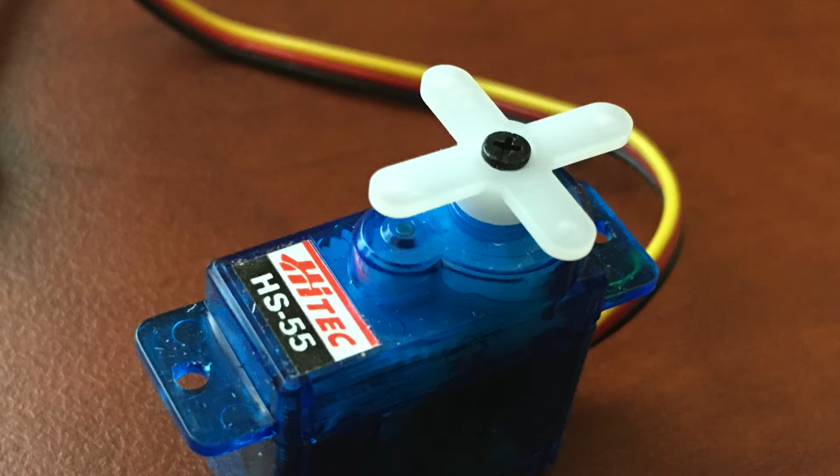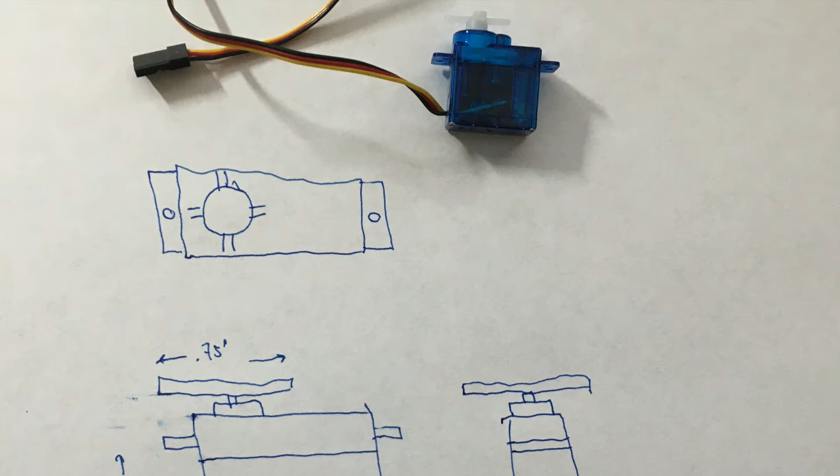In this second of two parts, we'll show how to draw the top and front view of an HS-55 servo in TurboCAD, going over some of the more common techniques.

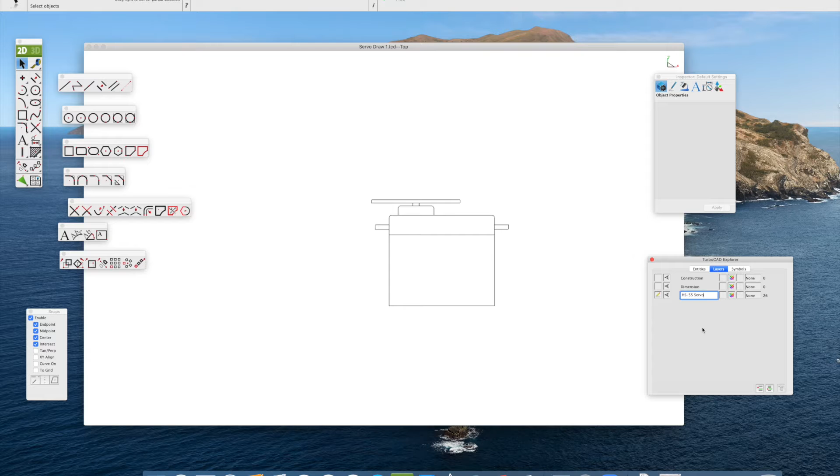Continuing from part one, this is the side view of the HS-55 servo. One thing I didn't do in the first part was name the layer. It's always a good idea to name whatever layers you're going to use. We're only using one layer in this example, but it's still good practice.

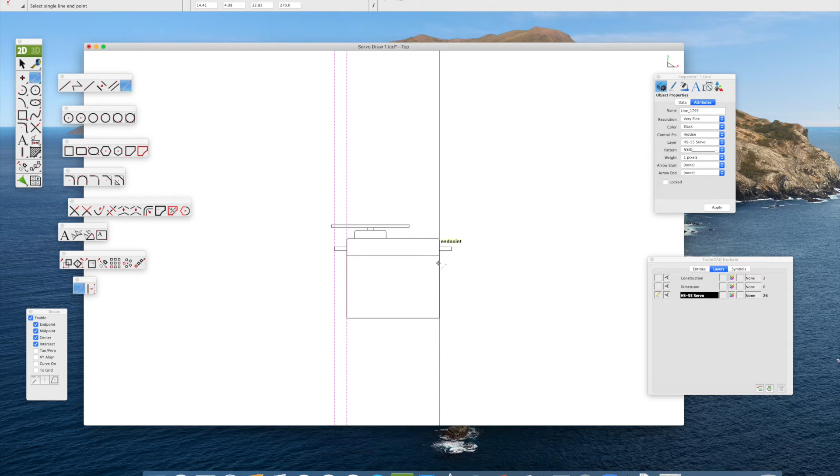Using the scroll wheel, we can enlarge or minimize the size of the servo. For the top view, we're going to put some construction lines using the snaps to the endpoints, which allow us to accurately copy the dimensions of the servo without having to remeasure the lines. You can put any number of construction lines on that you want. They can be deleted, and as you'll see in the video, they can also be used as cutting edges.

In this case, we're going to snap to the outer edge of the mounting arms for the servo. We'll use a parallel line tool and just drag it up, with the inspector bar at the top giving the correct distance for the width of the servo in the top view. Snapping to the endpoints, we can draw the other lines that describe the servo from the top view. Again, the construction lines are really handy because you can snap to the construction lines.

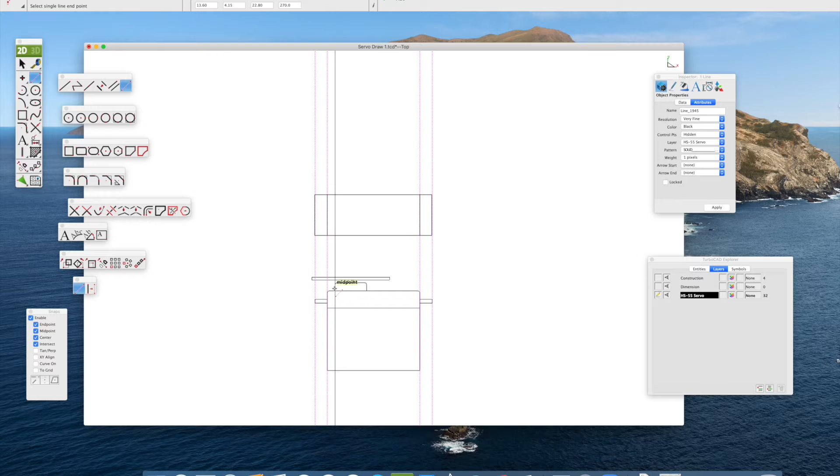Now we're going to add additional construction lines for the central gear housing to draw that circle using a two-point circle tool on the top view. Once the circle is drawn, we can go to the selector with the grabber and just place that circle in the middle of the top view.

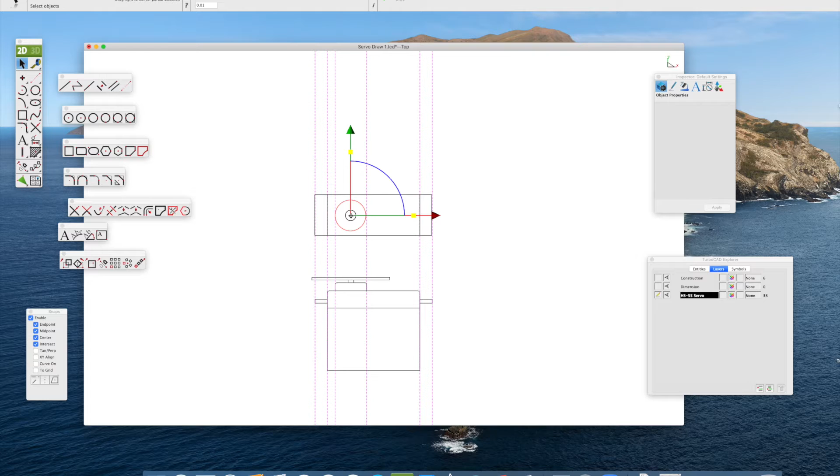Right-click to the construction lines, go to the bottom of that, and we can delete all the construction lines. Using the fillet tool, set a 0.02 radius. Again, you need a smaller radius because this is a pretty small servo, only about three-quarters of an inch long. And again, the fillets are just for appearance sake on the corners.

And it's always good to save your work in TurboCAD as you progress through the drawing.

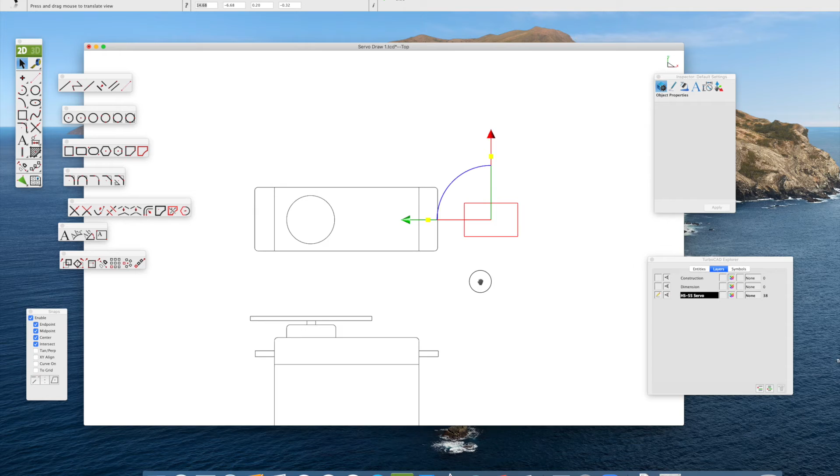Now we're going to add the HS-55 label to it. We're going to just draw a box, about the size needed for the HS-55 text. Using the rotate tool, we'll turn it close to 90 degrees in the inspector bar towards the top. We'll type in 90, hit enter, and that puts it precisely 90 degrees from where we had it before. Just move this off to the side.

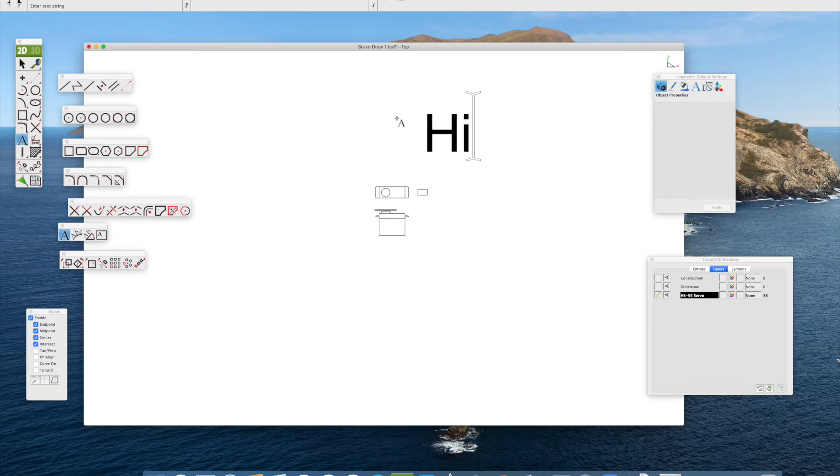Next we're going to select some text and add it to the inside of that box. Notice when we select the text, it's a rather large font size. We'll type in Hitec first. Then with the pointer, notice that we can select that, and also with the Explorer inspector, we can pick another size and type of text.

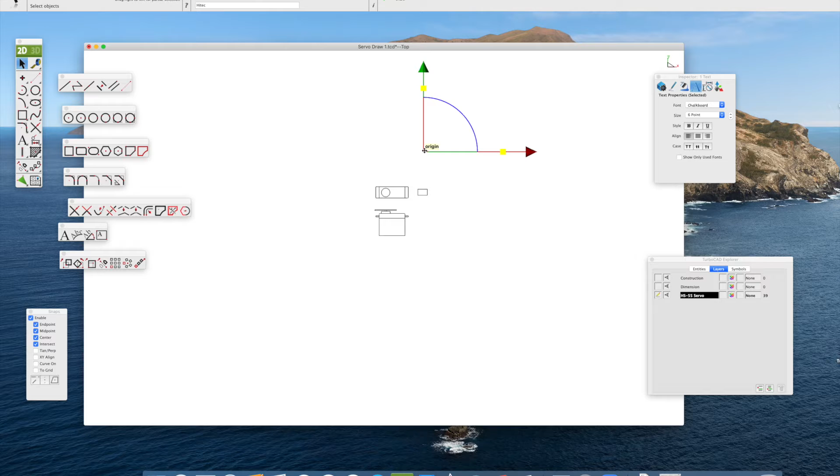There's a kind of cursive style for the text, so we'll just pick out something that looks good. And then we can also adjust the size. Notice it shrinks down to almost nothing because we're zoomed pretty far out. As we zoom in, there's the font size right there.

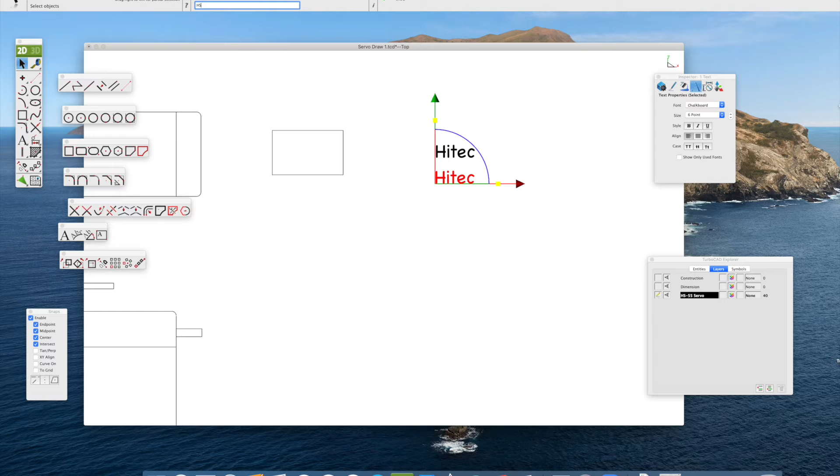Now the font, like any object, can be copied and pasted. Here's an important trick: we're going to change this to HS-55. Once we select that, notice up in the inspector window is the text - that's where you change the text, not on the object itself. So we type in HS-55, hit enter, and there's your text right there.

So now there are two separate text objects. We'll just drag that into the box, and here's the second one into the box. We'll put it where it looks pretty close to the center.

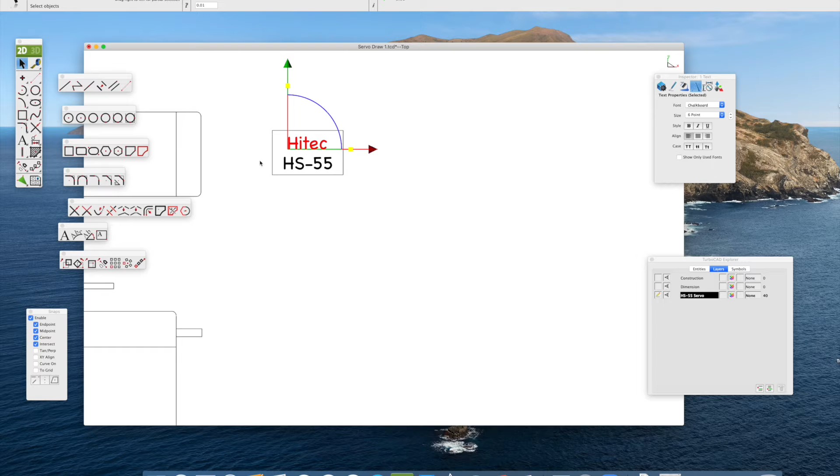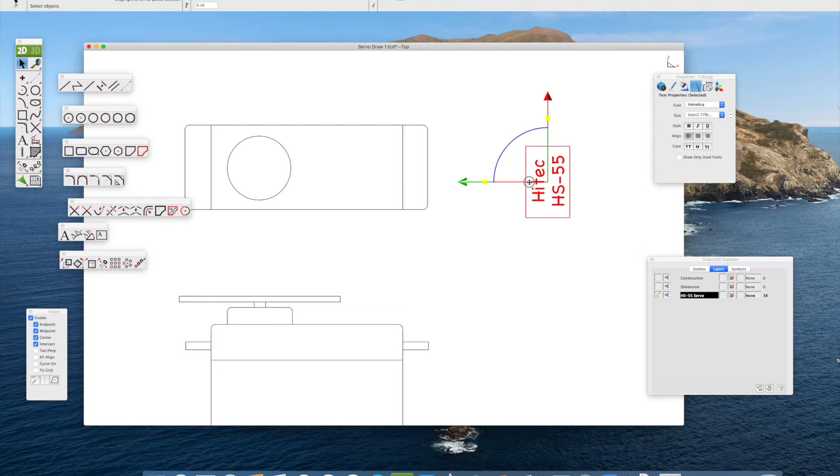Once that's done, we'll select all three objects, and under the edit command, we'll group them. That way we can move it around as one group. We'll go ahead and rotate that 90 degrees, and once that's done, using space bar and left click, we can drag it over and put the labeling for the servo onto the top view.

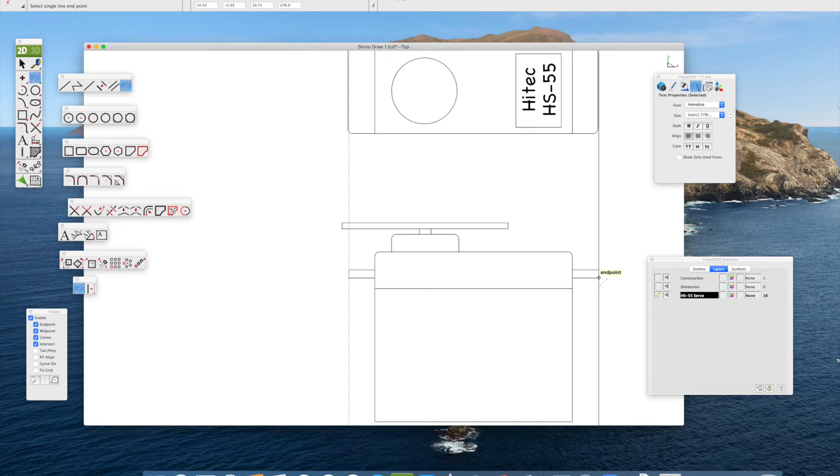And as I mentioned, always good to save. Now the next step is to draw the top servo arm. There's several ways to do this, mirror commands, etc. What we're going to do in this example is put some construction lines for the boundaries, and we'll just draw within that for the servo arm.

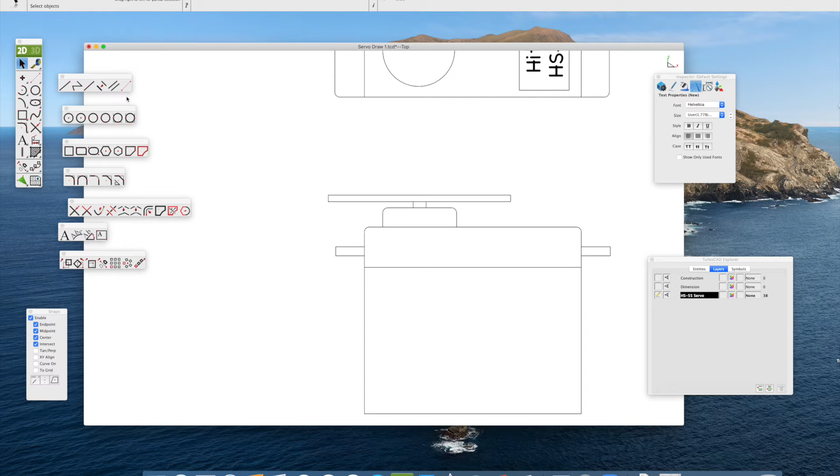Now notice I'd originally done the construction lines to the handles. That was a mistake. It should be on the servo arm itself. Again, just a demonstration that as you gain experience, you'll minimize these errors. Just delete the construction lines, put the new ones up.

So now we're going to draw the servo arm. So again, dragging over with the line tool, holding the shift key to keep it level. We'll put it on either side of the construction lines. Now we will trim those construction lines to the correct width of the servo arm.

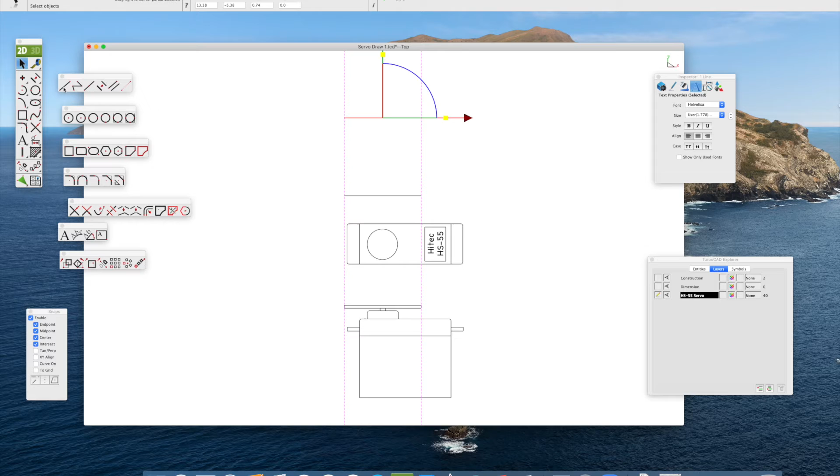And then we'll use the parallel line tool. We'll just check the length. And then use the parallel line tool to just drag up the distance, 0.75 inches, that is the servo arm that we measured on our sketch for the servo. Now that we have the top line in place, we can just use the line tool and just snap to the ends. And this is a square outline of the servo arm.

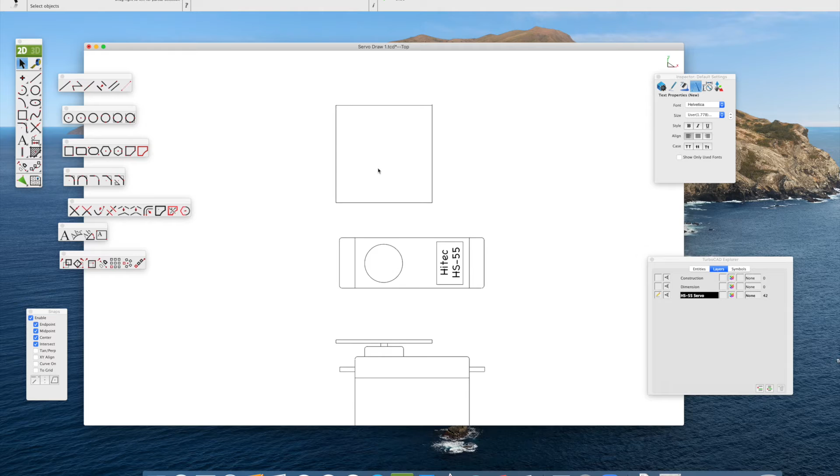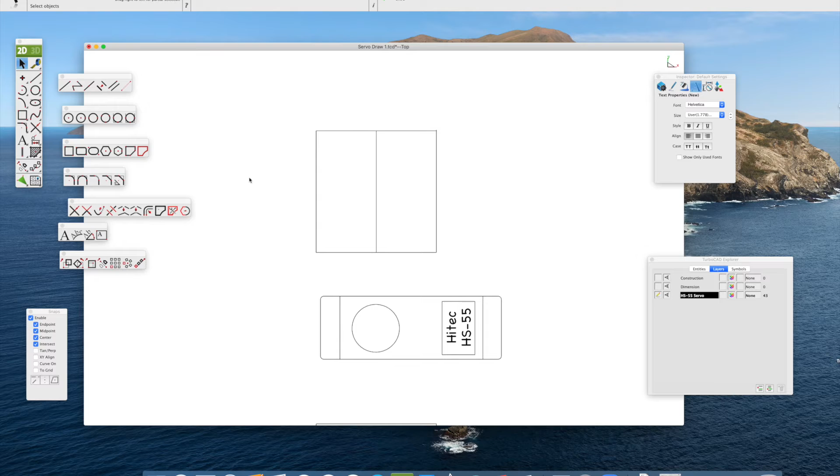Get rid of those construction lines. And now we'll build out the servo arm. What we'll do is we'll take some lines with the line tool and we'll draw from the midpoint of each line to have a starting point to draw parallel lines to create the servo arms, then trim to shape. So these are the centers of both lines. Just snap to the midpoint.

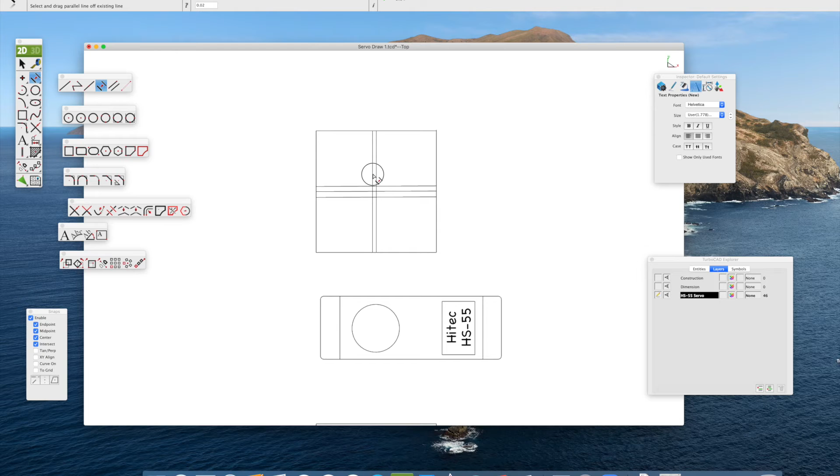Now we'll use a parallel line tool, and measuring the size of the servo arm, we'll drag a line half that distance, or about 0.03 inches. And we'll do that for all four sides of the servo arm. And do a quick save.

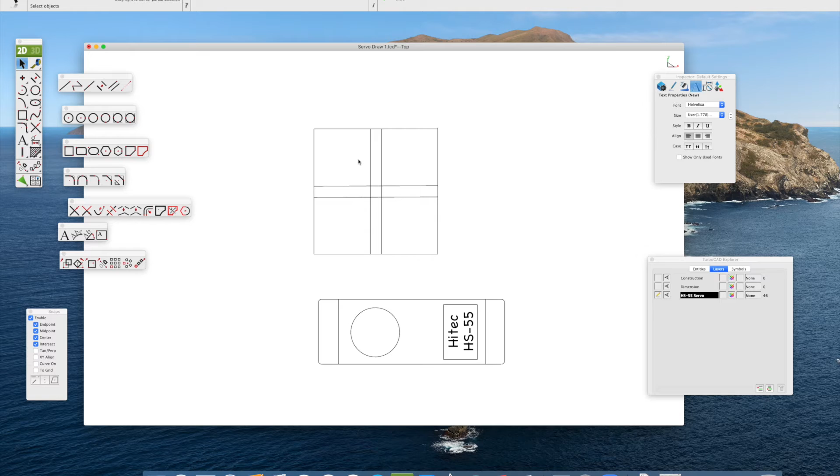And we can get rid of those middle lines at this point. Just select and delete. And now we have to trim the extra lines that we used to create this. So we pick the cutting edge, and those are trimmed away. Cutting edge, trim the top and the bottom.

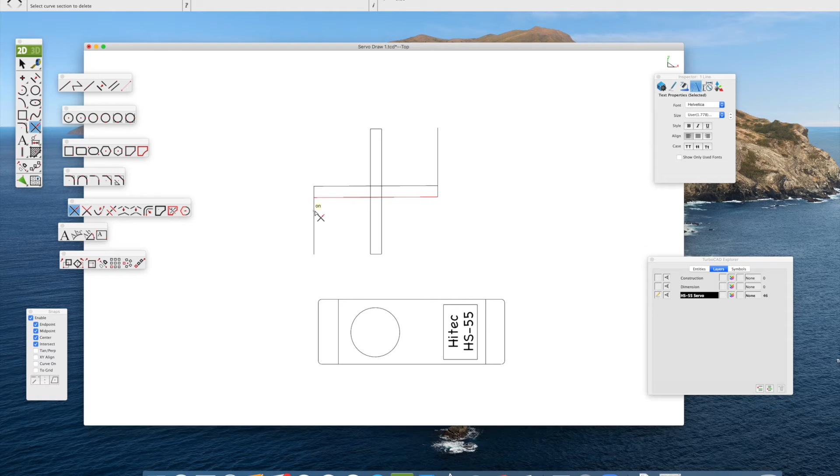Now, every now and then you'll run into an entity that doesn't quite compute. What is typically the case is the lines don't quite cross the other line and you can't do the trim. So we'll just work through that. There's easy ways to fix this if you run into that problem. So notice we've got these two lines that are going to be difficult to trim. What we do is we simply select the lines, hit the delete key, then we'll redraw the lines just snapping to the endpoints.

And now we'll finally trim, and we'll bound it. So we'll trim one side, hold down the Shift key to keep the boundary, let go of the Shift key, click on the inside to get rid of that section. We'll do that again for the other lines. Trim, hold down the Shift key, let go of the Shift key, click, and do that again for the bottom.

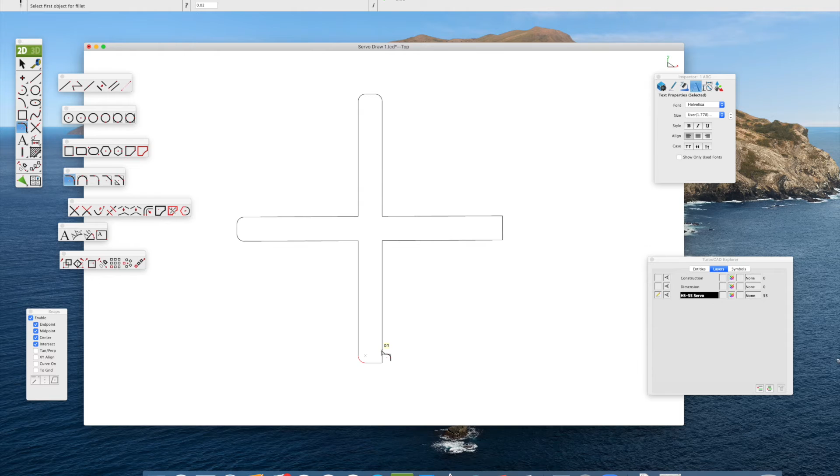Now we'll use the fillet tool to curve the ends. Very easy to do. Again, for the fillet, it's about a radius of 0.02, very small curve radius for this small object.

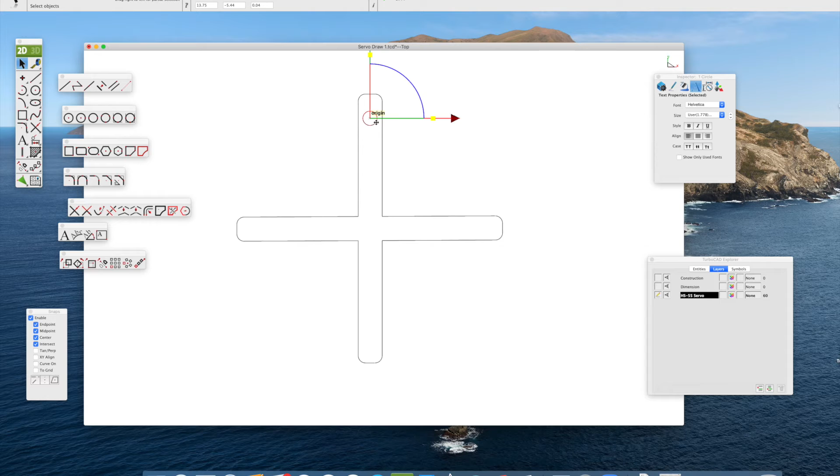Now the circle tool will just draw visually a circle that looks about right for the hole in the servo arm. We'll place it, again for appearance, to look good right about there. Now that it's selected, we'll go to Edit, we'll copy and paste. It'll paste right on top of that, so we just simply select it, left click, hold it down, drag it. We'll do that for all 4 arms in the servo.

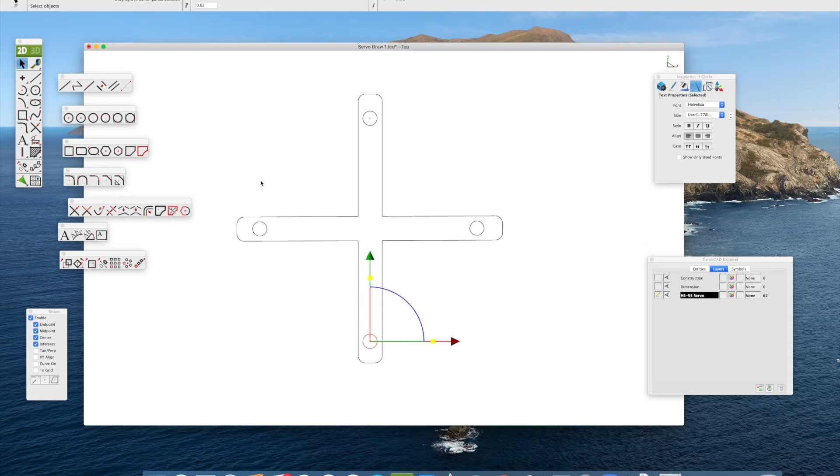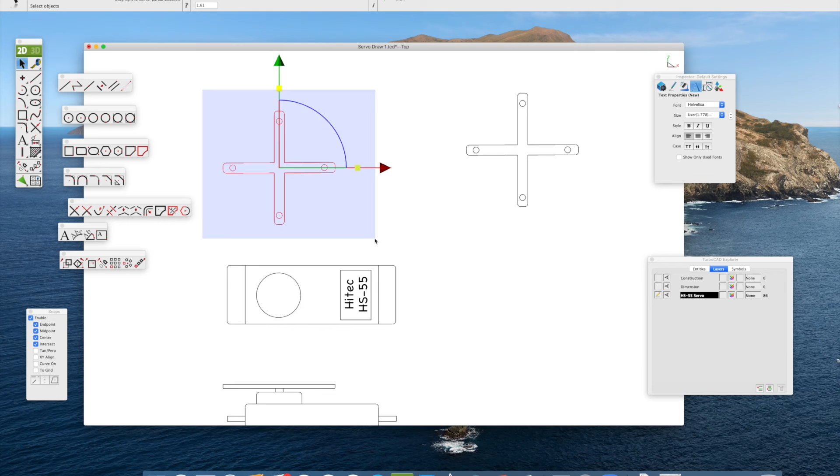I'll go ahead and save real quick. All right, so that completes the servo arm. Because that was a fair amount of work, what I like to do with these things is select everything, copy, paste, just so we have a clean copy of that to the side if we start making mistakes anywhere along the way. We'll select it again, center it on the circle for the top, and now we'll have to do trimming again to make that appear correct on top of the servo.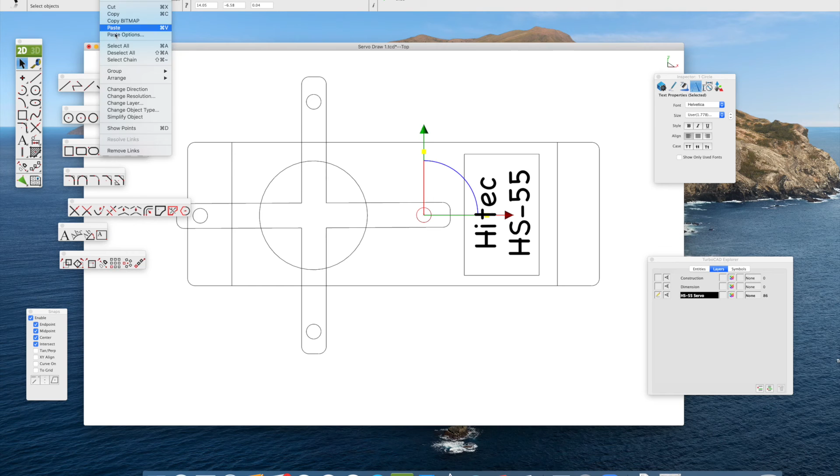Copy that and place it over on the side of the servo for the mounting hole on the side of the servo. We'll save.

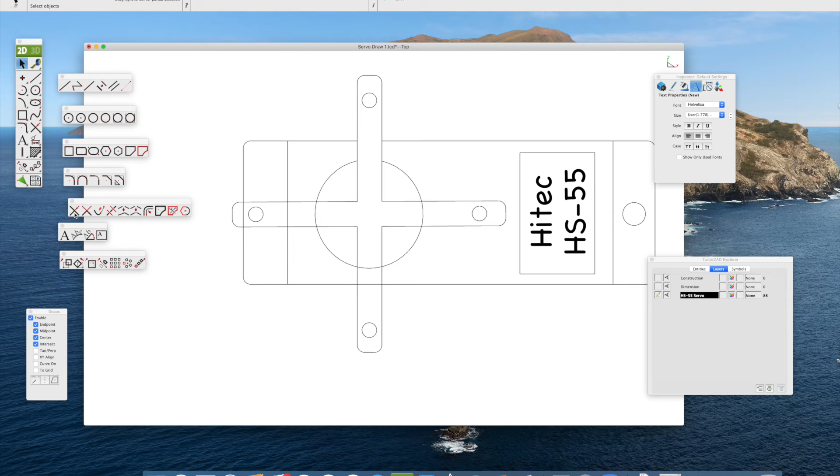And we'll start trimming. So again, Shift to have the bounded area for the trim. Go back to the pointer and make sure we clear that. Another boundary. Click inside. Click once, hold down the Shift key, establish a boundary, let go, click on the inside. And same thing for this with the boundary.

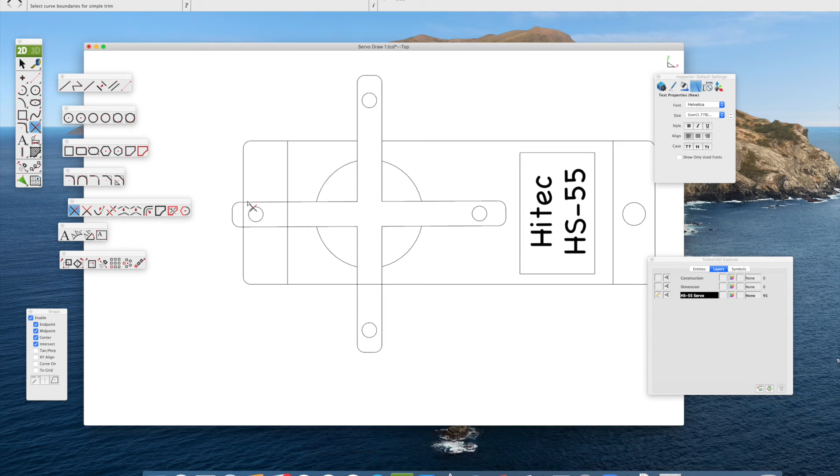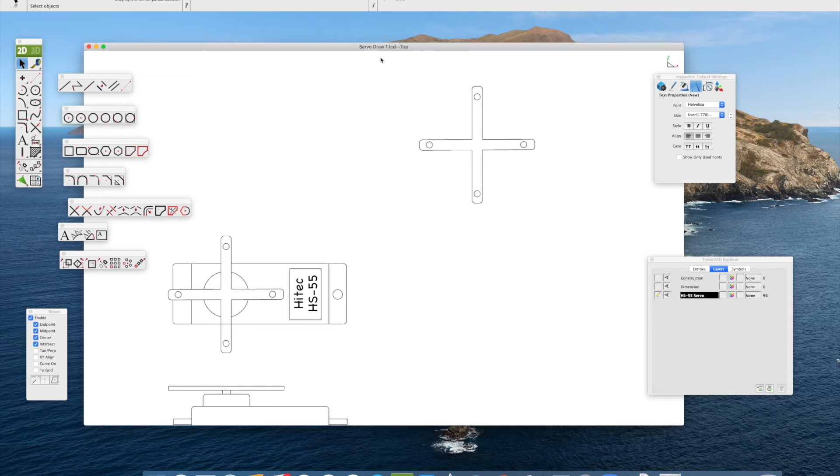I like to zoom out a little bit every now and then just to take a look at it, see what I've missed. You can see there's one line on the bottom arm that we haven't yet done, and we'll get to that in a moment. Now that we're complete with that, we can get rid of that copy. Then final trim for that bottom servo arm. Hold down the Shift, bound it, let go, click, and that is all cleaned up.

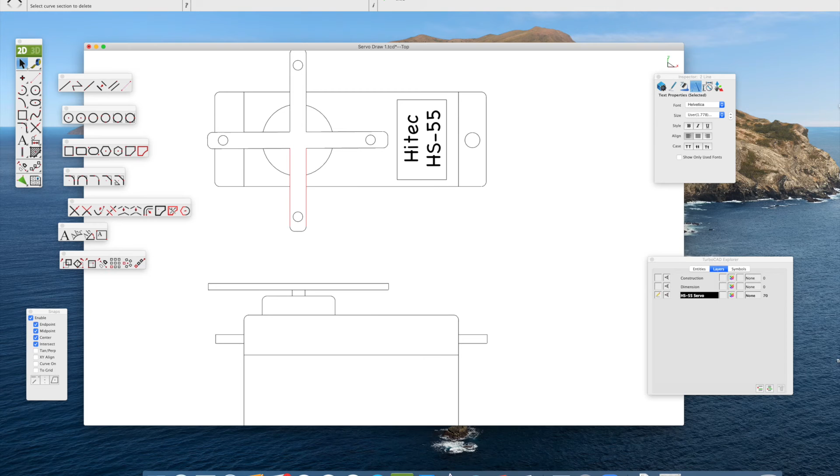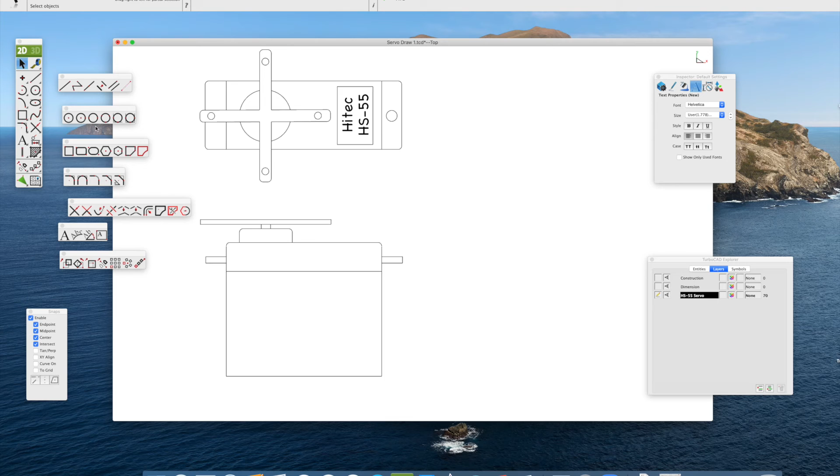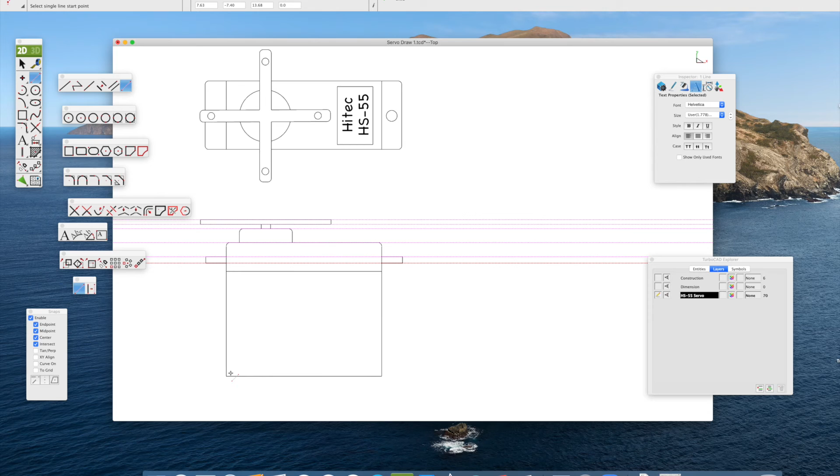So now we can start thinking about the front view of the servo. Again, we lay out some construction lines, just snapping to the endpoints. Hold down the space bar, left click, and we can drag the picture to where we want.

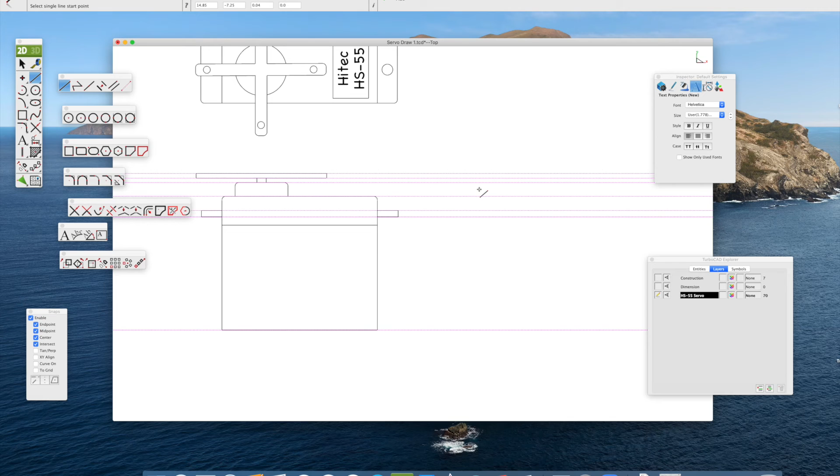And now we can start adding some lines. Again, with the Shift key, we'll keep it aligned 90 degrees straight up. We can trim that to just the right size or length. Then with the parallel line tool, we'll drag a parallel line the width of the front view of the servo that we measured before in our sketch. Snap to the endpoints.

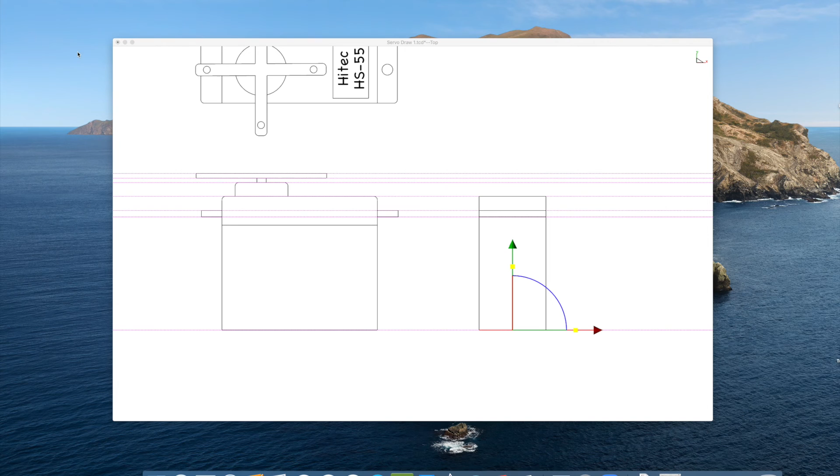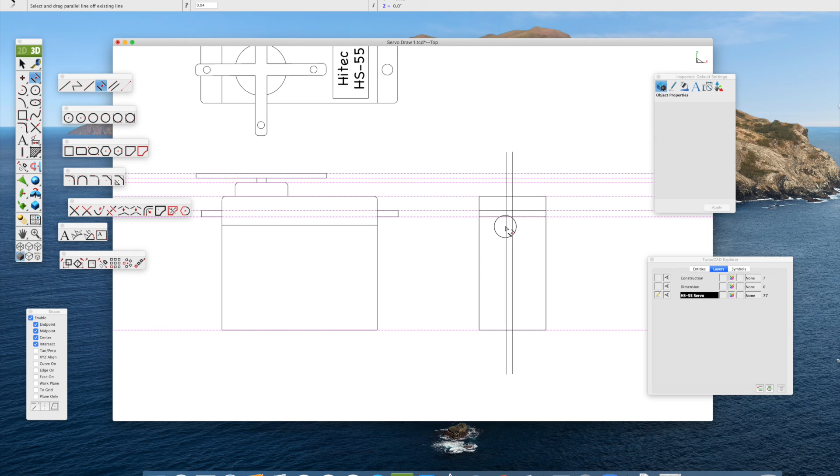And a quick save. Now we'll add a center line to build the other portions from, dragging up the yellow handle to make the line a little bit longer. Again, this is just a center line placeholder we can draw parallel lines from as we complete the rest of the servo. So this is the width of the top of the gear housing. We've measured that so we know what half the diameter is. We drag another line to the other side.

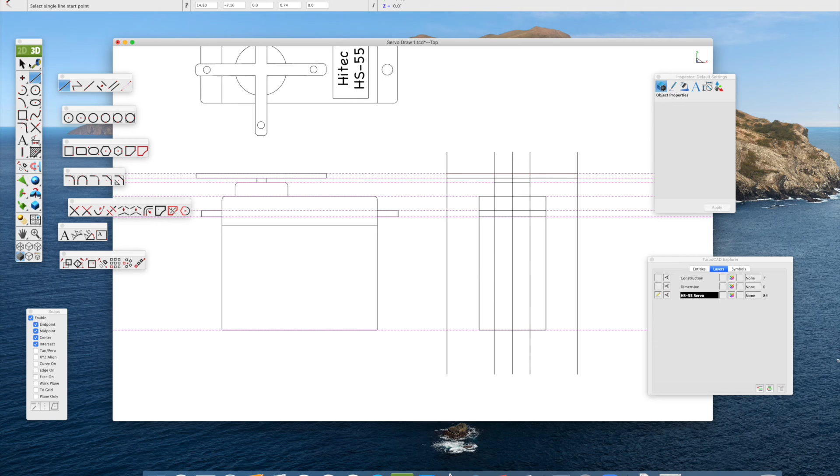Then we can drag another line to establish the outer boundary of the servo arm, 0.75 inches in diameter for that servo arm. This will be the top of the gear housing for the servo, and we can draw in the upper and lower lines of the servo arm, snapping to the endpoints there. Quick save.

And now we can start trimming to make the final end view of the servo. Again, before you start trimming, always make sure that nothing is selected. That'll just confuse the system. By going to the selector and getting rid of any selection in the drawing. As you practice at trimming, you'll start to establish a vision of where you're going. You can do this pretty quick. We're just taking it a step at a time so you can watch what's going on. Again, the cutting edge.

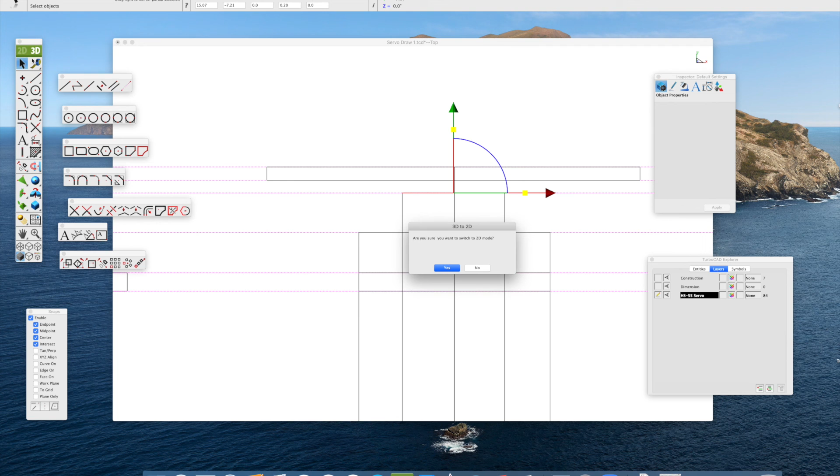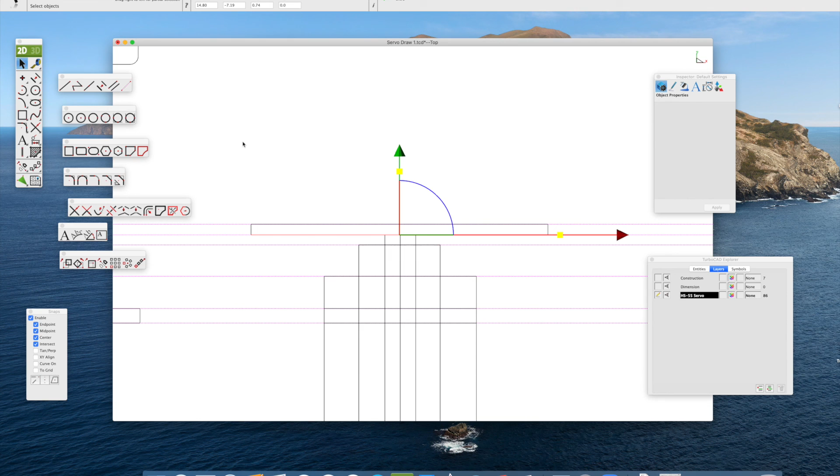And this will use a parallel line tool just to have the output shaft for the mounting for the servo arm. Now some further trimming of that. Simply select this line and delete it. It was a center line. We don't need that for anything right now.

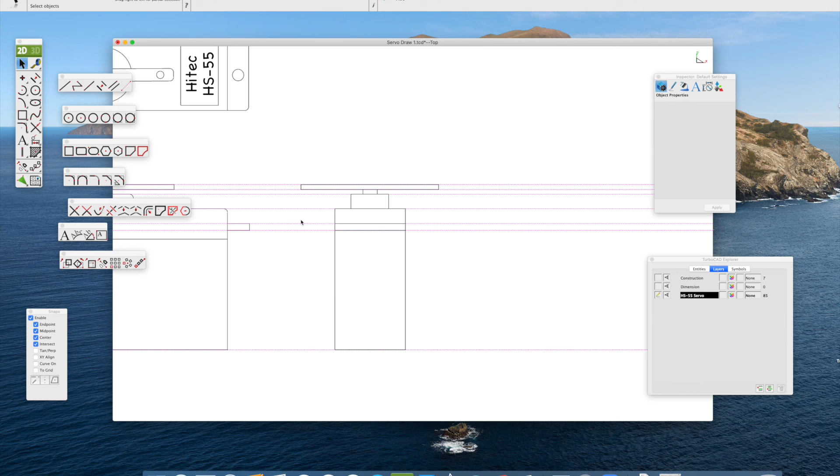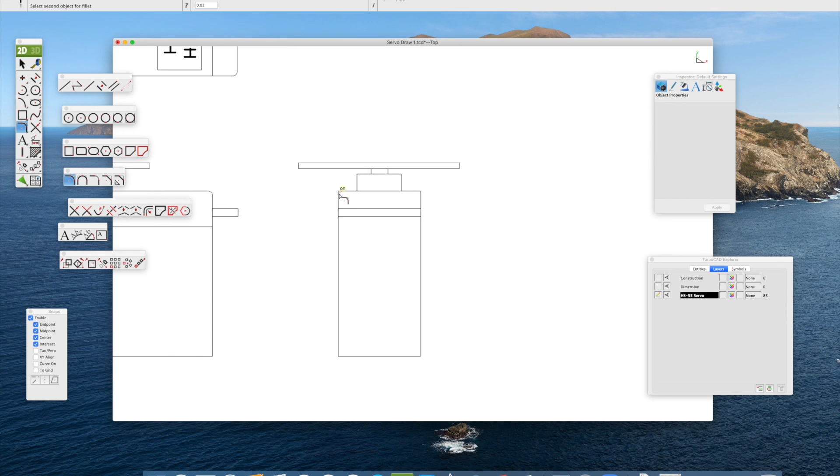Right-click construction lines, delete all the construction lines. And then the fillet tool to put a curve on the top of the servo. And that is the completed 3-view using TurboCAD of an HS-55 servo.